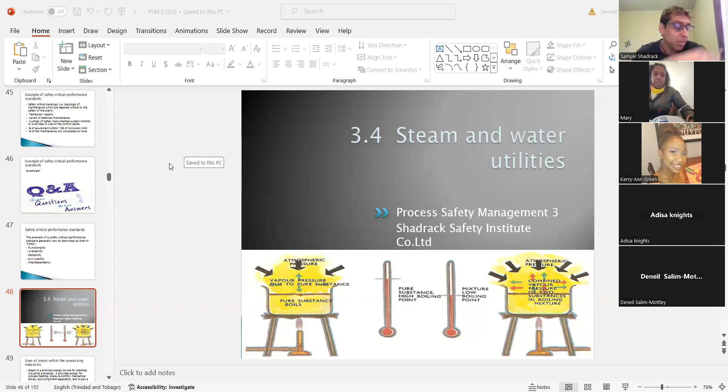So we're looking at STEAM. Let me just run through the slide first to get something behind us, and we'll look back at the book a bit. I'm actually on page 72, 73 already. So STEAM, the heading here is the uses of steam within the process industries.

Steam is a principal energy source for chemical industrial processes. It provides energy for process heating, pressure control, mechanical drives, and component separation, and is also a source of water for many industrial operations and chemical reactions. The popularity of steam as an energy source stems from its many advantages, which include low toxicity - remember, it's steam, it's water that you heat - transportability, high efficiency, high heat capacity, and low production costs relative to other energy transport mediums.

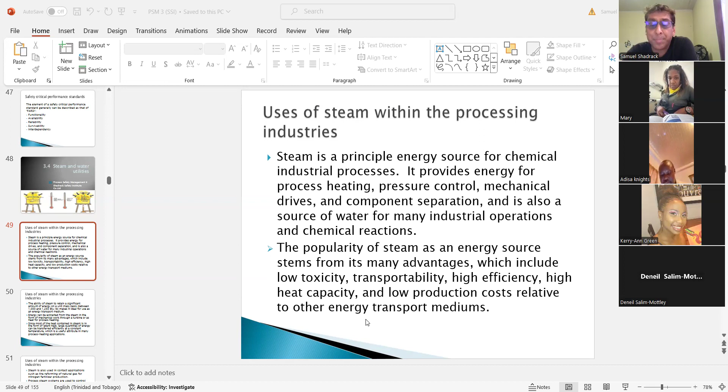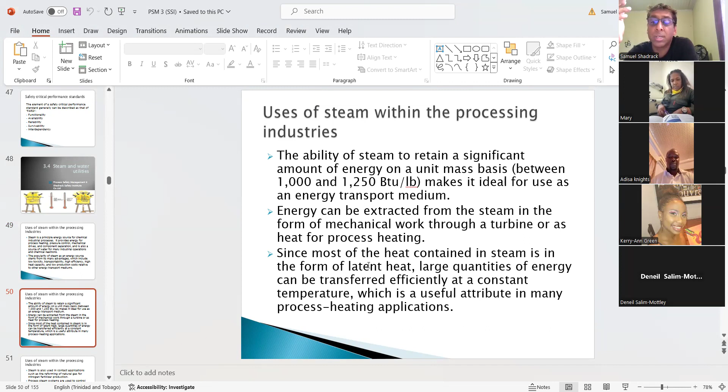Nothing there for the exam as yet. So reading on: the ability of steam to retain a significant amount of energy on a unit mass basis, between 1,000 and 1,250 BTUs per pound, makes it ideal for use as an energy transport medium. Energy can be extracted from the steam in the form of mechanical work through a turbine or as heat for process heating. Since most of the heat contained in steam is in the form of latent heat, that means hidden heat, large quantities of energy can be transferred efficiently at a constant temperature, which is a useful attribute in many process heating applications. Steam is also used in contact applications such as the reforming of natural gas for nitrogen fertilizer production.

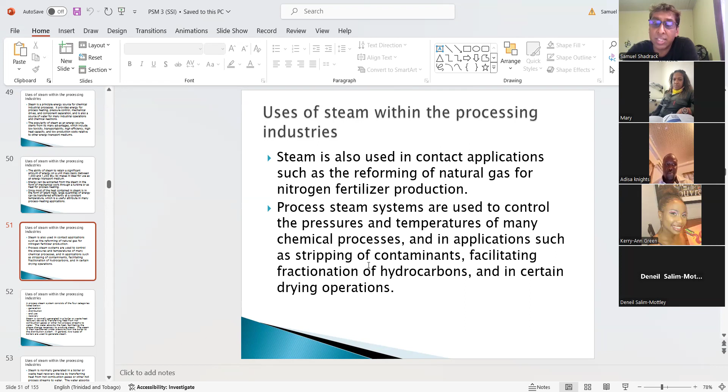Process steam systems are used to control the pressure and temperature of many chemical processes, and in applications such as stripping of contaminants, facilitating fractionation of hydrocarbons, and in certain drying processes or operations. A process steam system consists of 4 categories: the generation of steam, the distribution of steam, the end use of steam, and the recovery of steam.

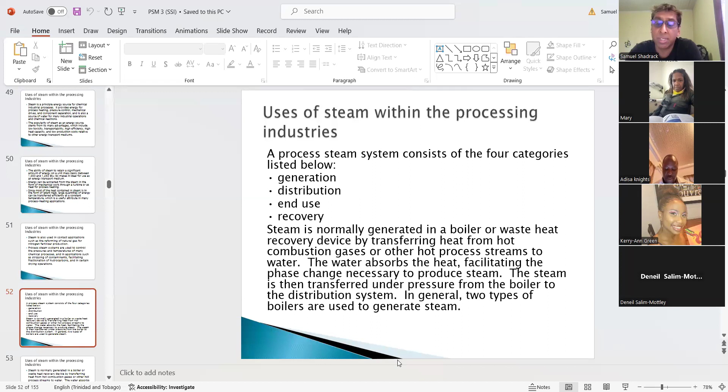Steam is normally generated in a boiler or waste heat recovery device by transferring heat from hot combustion gases or other hot process streams to water. The water absorbs the heat, facilitating the phase change necessary to produce steam. The steam is then transferred under pressure from the boiler to the distribution system. In general, 2 types of boilers are used to generate steam. I think this is the same thing from the last slide, right?

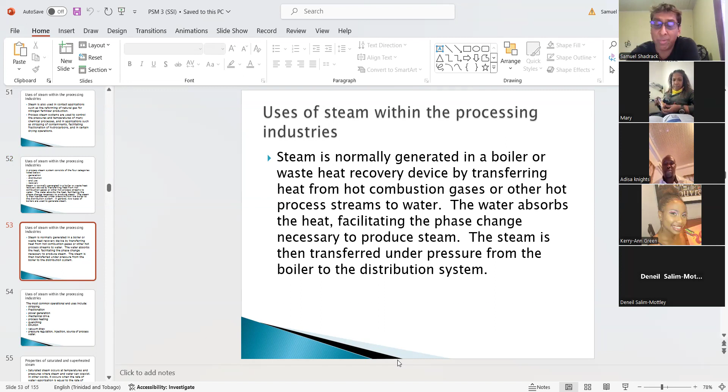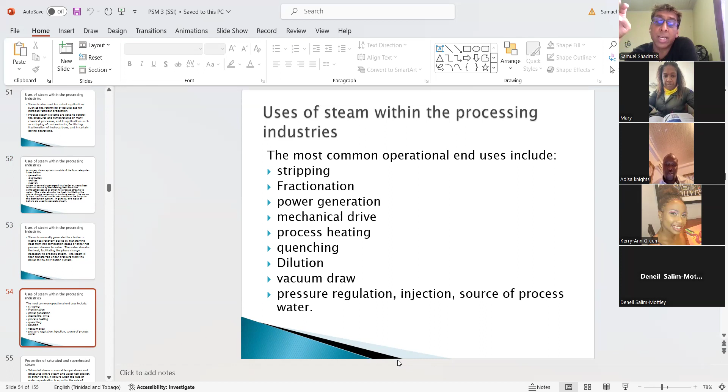The most common operational end uses of steam include stripping of contaminants, fractionation - this is the use of steam - power generation, mechanical drives, process heating, quenching, dilution, for example of oil. They use steam a lot in the oil industry. Vacuum draw, if they want to clean a tank, steam can be used for that. Pressure regulation, injection into wells like oil wells, and as a source of process water.

Okay, so none of that is for the exam. So I'll tell you to read and get to the exam question. So the exam question is this.

If you have your book, page 72, steam is good, it's just water that you heat up. So if you watch the slide or your book, you'll see there are two kinds of steam: saturated and superheated. There are two types of steam, and what they like to ask is what's the difference between them, or at what temperature one is versus the other. So before I read, I'll explain it to you, then we'll read a little bit.

If you have made tea or boiled water or cooked food, and you lift up your pot cover, you would realize it will have steam, but also water droplets as well. That type of steam is called saturated steam. This is exam material, so I'll break it down the simplest way. Saturated steam is the steam you have in your kitchen, at 100 degrees Celsius because water boils at 100 degrees Celsius. If you boil water and take off your kettle or pot cover, you would see steam, and then you would see water. That's called saturated steam, where you have steam and water together.

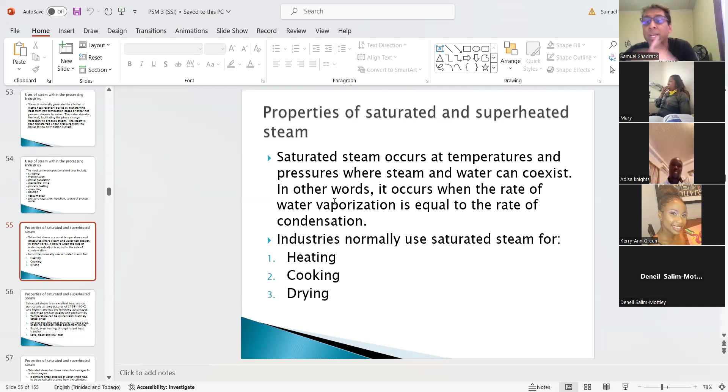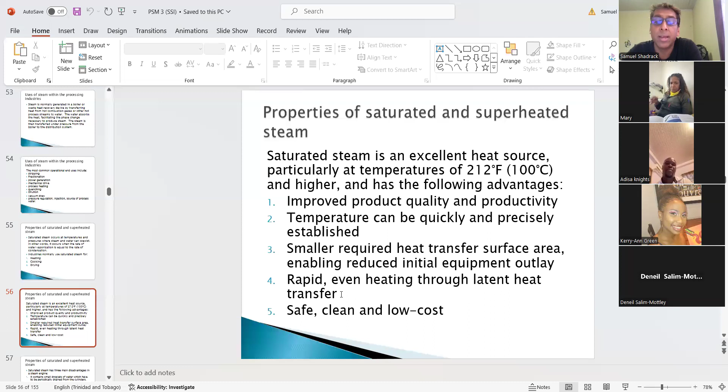If you watch the note here, saturated steam is where steam and water can coexist. All these big words mean the rate of vaporization is equal to the rate of condensation. I don't think they'll get into that, but saturated steam is the one at 100 degrees Celsius. It's easy to produce, it's just water you heat, at 100 degrees Celsius or 212 Fahrenheit.

That's saturated steam. Because it has water in it, it may contain water droplets, and that may create things like rust. There's bacteria that tends to love to live in hot water runoff, so saturated steam may cause corrosion because it has water in it. If you want to write anything down, I've said it twice already: saturated steam has water in it, contains small droplets of water.

Of course, when you're studying, you have to study your work, you can't just wait on me to pinpoint anything for you. But you read your notes and know this is a trending topic. So saturated steam has water in it, and some people refer to it as wet steam because it has water in it. Saturated steam is sometimes called wet steam.

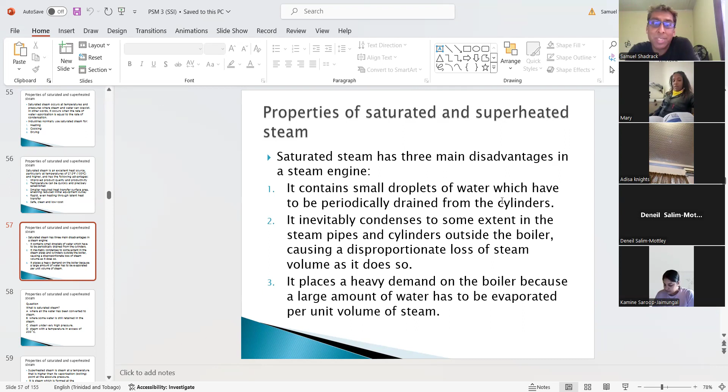Before we go to the book, I'll do the other one first. Superheated steam is steam that is above 100 degrees Celsius. You can actually create superheated steam in your kitchen, but you have to get a blowtorch. The same pot you were heating on the stove, you have to apply more fire to it. The burner would only produce so much fire, which would carry it to 100 degrees Celsius. But if you want to superheat that vessel, that pot, you'd probably need a kitchen blowtorch, which chefs around the world normally use. So if you had a kitchen blowtorch, you could apply that to your pot.

What's going to happen if you start to superheat your already existing vessel with water in it? The steam is going to disappear. The emissions from the pot, like when you're boiling water, you'll see steam, but with superheated steam it would be invisible. So superheated steam is above the boiling point, you have to exceed 100 degrees Celsius. When you do that, applying additional flame, the steam becomes invisible. Superheated steam is actually better than saturated steam because it does not have any water in it, but it has a hazard in it.

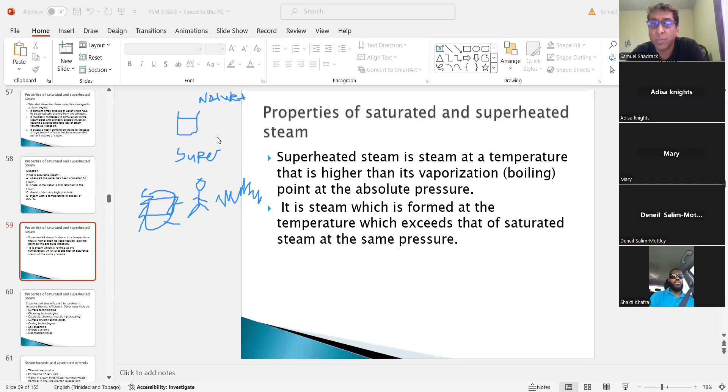And so you think you're okay with that? Just take a look at that. And they do have questions on that in every sitting anyway. Most times they tell you like, well, which one is which? So which one is superheated? Which one is saturated? There may be a question here, so we can take a look at it.

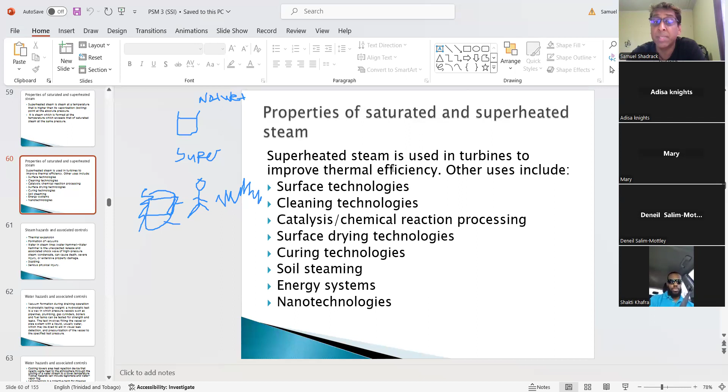This is the many uses of superheated steam. This is the one with no water now. When you heat the steam, it's very good for cleaning because it doesn't wet anything. Soil steaming, energy systems, nanotechnology to clean out those little computer bits and stuff because it's not wet. It's going to sanitize, it's going to sterilize. So superheated steam is very good for cleaning and whatever have you in the chemical industry.

Let me see if I could find the question. Some of the hazards of steam: thermal expansion, formation of vacuums, water in the steam line, and this will be talking about which type of steam. If you have water in the steam line, like what type of steam is that?

Saturated, very good, right? So let me see how to break this one down for you. I don't think there's a question there, but I guess this is if you happen to work in the industry, and you don't have to, I just saying, right?

But if you are home, and those of us in Trinidad and I guess in Guyana, if your water company put on the water then under excessive pressure, you'll actually hear the water in the line create a sound, right? So in the oil industry that's very common. When the lines are on, when they're pumping oil through the line, you have to hear it. It vibrates then, right? So that's something called a water hammer. And that could actually result in the pipe bursting and whatever have you, right?

So in steam lines, water hammer is the unexpected release and associated shock wave of high pressure steam condensate that can cause death, severe injury, or extensive property damage, as the line is broken because of the pressure of the fluid in the line, right?

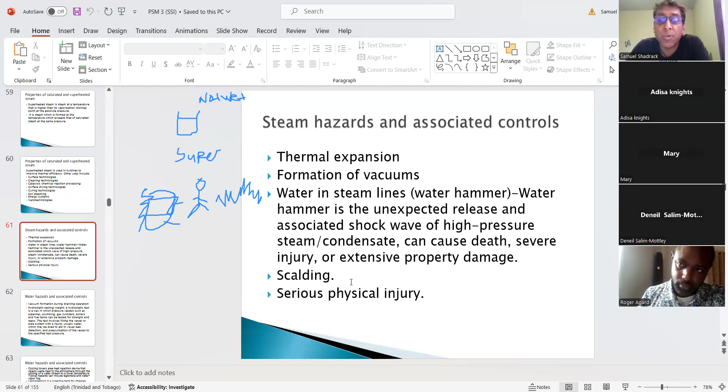Some hazards of steam could be scalding, serious physical injury, and I guess that's probably, let's see if we can find a question on steam, right? So, or did I pass it? I think I passed it. It has more than one though, but look, have a question here, right?

It comes in every sitting. Now, it doesn't have to be saturated. It could be superheated. Just remember, you just have to keep on heating the steam for it to be superheated, right? So what is saturated steam?

This is from a past paper. They have where all the water has been converted to steam, saturated steam, right? If you want, you could think of SpongeBob, a sponge, saturated, right? A sponge, where some water is still retained in the steam, under very high pressure.

The question is on saturated steam, which is the one in your kitchen. Steam at a temperature in excess of 200 degrees Celsius, right? Which one do you think is the best answer here? And I'll tell you why the others are wrong.

Saturated steam is one with what? I got one answer on the chat. Okay, B, thanks there, Shakti. That is actually, let me wait until the rest of them say something. Which one is saturated steam? Where all the water has been converted to steam.

Look at here. Saturated steam is actually called wet steam. So where all the water has been converted, that's not saturated, that's actually superheated. So A is wrong.

Saturated steam is not under any high pressure because, as the one in your kitchen, you can just boil water and you create saturated steam. And the boiling point of water is 100 degrees Celsius, so this is actually wrong. So the best answer here is actually Shakti's answer, which is B. Thanks there, Kamine, as well, right? So those two answers are correct.

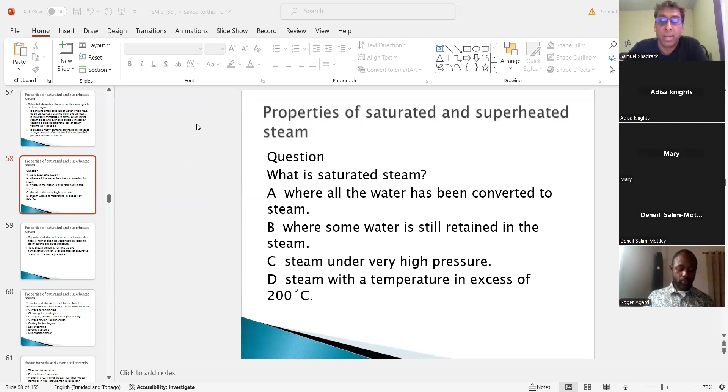All right, let's go again. So water hazard - if you want, I'll read again because there is a passage here or two. Let's read them out and then I'll tie it together. So water hazards and associated controls: vacuum formation during the draining operation, right? Hydrostatic testing or weight testing.

A hydrostatic test is a way in which pressure vessels such as pipelines, plumbing, gas cylinders, boilers, fuel tanks can be tested for strength and for leaks. The test involves filling the vessel or pipe system with liquid, usually water, which can be dyed to aid in visual leak detection, and pressurization of the vessel to the specified test pressure.

There's a question right there. If any new vessel has been created or welded, they normally hydrostatic test it. What is hydrostatic testing? They fill it with water and let it stay to see if the tank can hold the water. If anyone is familiar, there was an accident with this in Trinidad, where they filled a tank, but the tank couldn't hold the pressure and it burst.

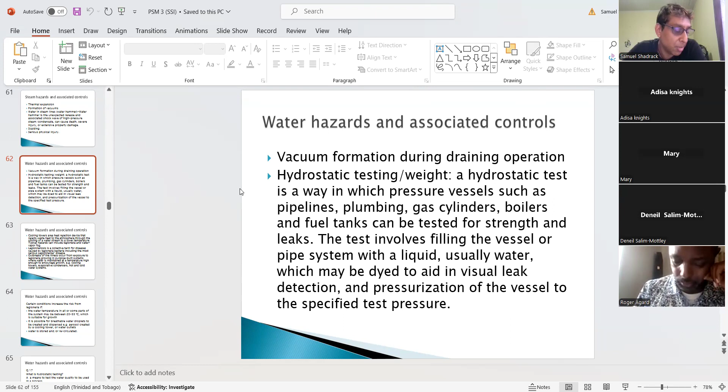And we can move on because this is a question - what is hydrostatic testing - that has come before for exam. If you look at the book, page 75, there's another kind of hazard there. Let me read it out first and then I'll explain it.

Cooling tower area heat rejection devices reject waste heat into the atmosphere through the cooling of a water stream to a lower temperature. Typical hazards can include Legionella and water-vapor fog. So just when you're cooling down steam, remember the water runoff is going to be kind of warm, and there's a bacteria that loves to live in that.

We have had some deaths in Trinidad - I'm not too sure if around the world, well, I mean like Guyana too - in terms of legionellosis. Legionellosis is a collective term for diseases caused by the Legionella bacteria, including the most serious, Legionnaire's disease. Outbreaks of the illness occur from exposure to Legionella growing in purpose-built systems like a condenser, something that has to cool down steam, where water is maintained at a temperature high enough to encourage growth. Examples: cooling towers, evaporative condensers, hot and cold water systems.

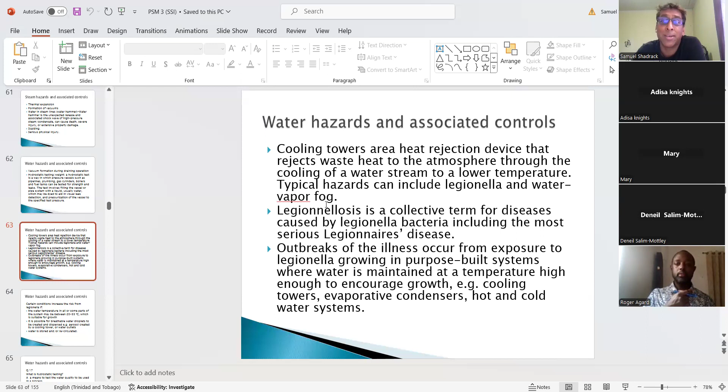Anyway, I used to be working all around all of those things and I never even knew that. I mean, when I used to be working in the industries, I never knew that. I used to be working all around those condensers, literally where the water run-off was, right?

Anyway, water hazards and associated controls. Certain conditions increase the risk of Legionella if the water temperature in all or some parts of the systems are between 20 to 55 degrees Celsius.

A pause because you have to know that. I don't know if you want to find it in your book, page 75, or just take it in the notes. That's where the bacteria like to live, where the temperature is between 20 and 55 degrees. It is possible for breathable water droplets to be created and dispersed - example, aerosols created by a cooling tower or water outlets - where water is stored and/or recirculated. If you get those places where you have warmer waters being recirculated, and the bacteria is in that, you can actually breathe in the bacteria if you breathe in the water droplets, right?

Where water systems have temperatures maintained at 20 to 55 degrees Celsius, it could result in bacteria growing there, and the bacteria results in a condition known as legionellosis or Legionnaire's disease.

Let me see if it's on this slide. Okay, if not, let me tell you. Legionnaire's disease symptoms are like the flu, like COVID-19. The symptoms are the same as the flu. And why I mention COVID-19 is because it affects the lungs, and Legionnaire's disease also affects the lungs.

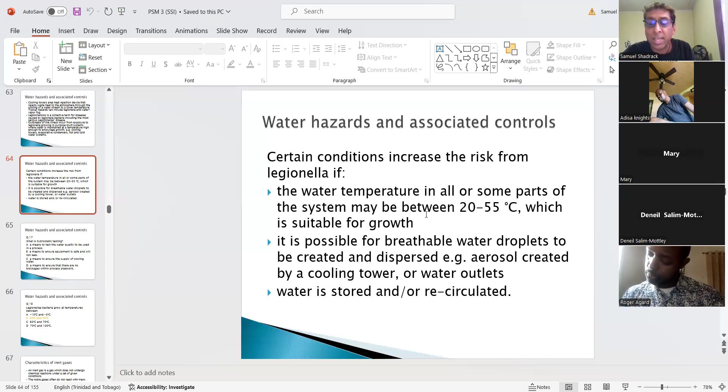Folks, I think there are two questions here, but I'm going to make three out of it. I think there's one there, but I'll make three because there's another tricky one I saw, and I wanted to give you my opinion on that answer as well.

So this one here: what is hydrostatic testing? A, it means to test the water quality to be used in a process. B, it means to ensure the equipment is safe and would not leak. C, it means to ensure the supply of cooling water. D, it means to ensure that there are no blockages within the pipework.

What is the purpose of hydrostatic testing? Why do we fill the tanks with water before we actually fill it with oil? What's the purpose of it? Which is the best answer? B. Very good.

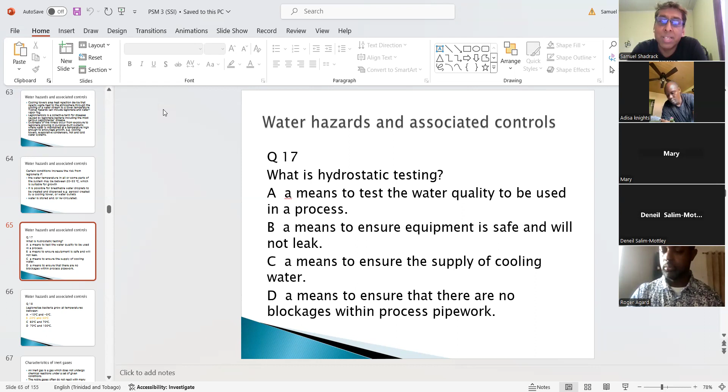So B for this one. Let's take a look at this one.

Well, I kind of highlighted the answer for it, right? Legionella bacteria grow at temperatures between 20 and 55. Remember, you have to learn this for the exam. You are seeing it, I've said it, and you are seeing it. 60 to 70, 70 to 100, right? All right, so listen to this one.

So that's the end there for steam and water and stuff, right? And we came across quite a lot of questions. What is saturated steam? What is superheated steam? What is hydrostatic testing? What is the condition needed for Legionella to develop, right? And we know how serious Legionella is. If this is not treated, the person will die. I told you before, I know of some deaths of this in vessels here in Trinidad as well.

All right, listen to this one though. I don't know if you want to paraphrase one for me. When I say paraphrase, I'm going to write it on the slide.

Okay, so very good for those who took part. I had Shakti there again. Let me just check on the chat, but the thing seems to be frozen. Let me see what's happened. Okay, okay, good, I don't think it moves anymore from that.

All right, so there's another question I saw and I wanted to take this down, so we can take it to be the same question. Legionella bacteria grow at temperatures between, but another question went like this, right? So the answer, well, 20 degrees - by the way, I'm making up these, but I remember some of the numbers then, right? So like, what do you put now if they give you something like that? These are some of the numbers I saw on that past paper.

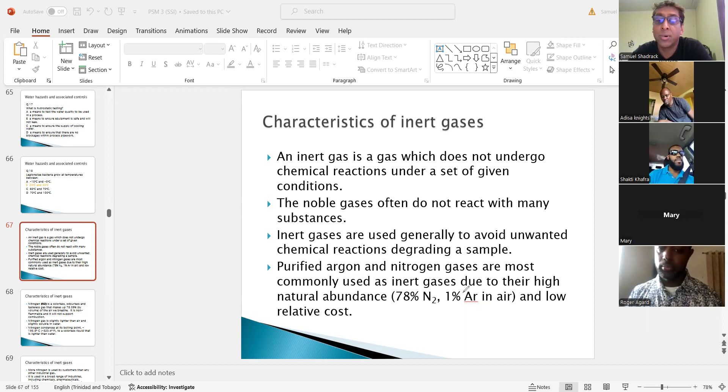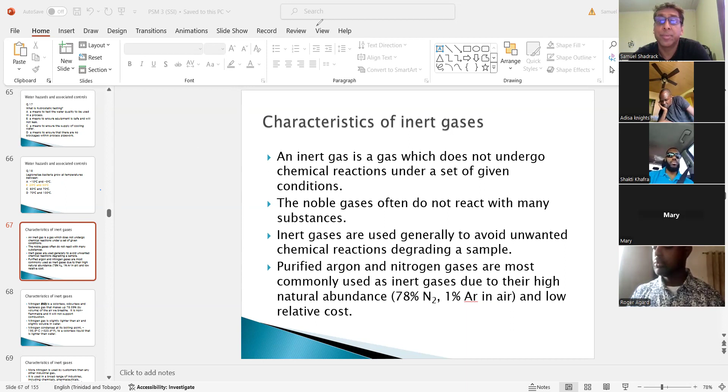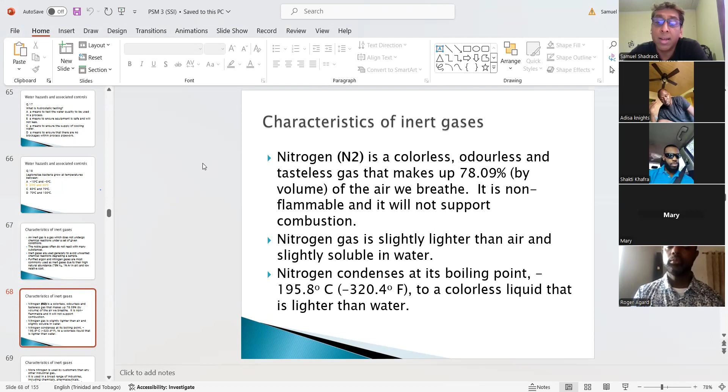So, moving on. Nitrogen is a colorless, odorless, and tasteless gas that makes up about 78.1% by volume of the air we breathe. It is non-flammable and will not support combustion. Nitrogen gas is slightly lighter than air and slightly soluble in water. Nitrogen condenses at its boiling point, which is minus 195.8 degrees Celsius, or minus 320.4 Fahrenheit, to a colorless liquid that is lighter than water.

More nitrogen is used by customers than any other industrial gas. It is used in a broad range of industries, including chemicals, pharmaceuticals, petroleum processing, glass and ceramic manufacture, steel making and other metal refining and fabrication processes, pulp and paper manufacture, and healthcare. Aside from nitrogen, N2, nitrogen may be referred to as GAN or GN in its gaseous form, and LIN or LN in its liquid form.

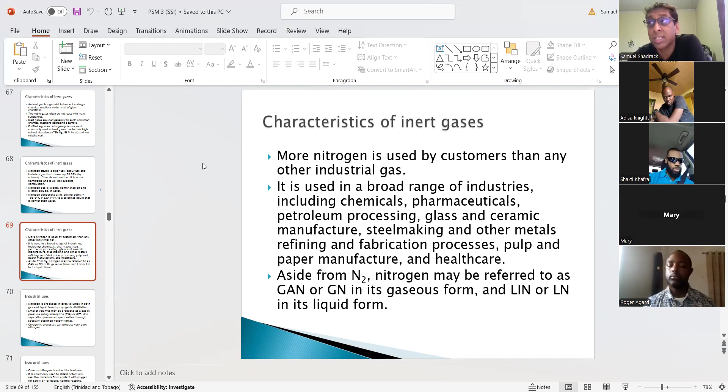I actually saw that in a company in Trinidad. Before I saw it, I didn't think we used that, but Trinidad does produce nitrogen. Remember, we have that capability, right? Massy gas and stuff does a bunch of that as well.

Nitrogen is produced in large volumes in both gas and liquid form by cryogenic distillation. Smaller volumes may be produced by pressure swing adsorption or diffusion separation processes, which is permeation through specially designed hollow fibers. Cryogenic processes can produce very pure nitrogen.

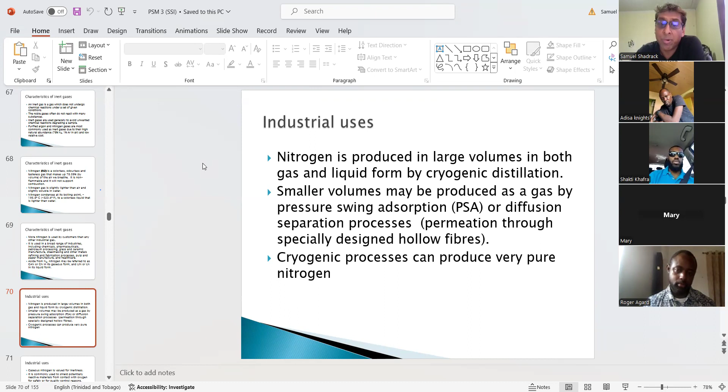Gaseous nitrogen is valued for its inertness. It is commonly used to shield potentially reactive materials from contact with oxygen for safety or quality control reasons, providing inert atmospheres, purging, and blanketing of storage tanks. It is used as a firefighting agent. It is used in pipeline freezing operations. Nitrogen can also be used in certain instruments as a backup supply of air, where they don't want to use oxygen because oxygen may be a source of fire.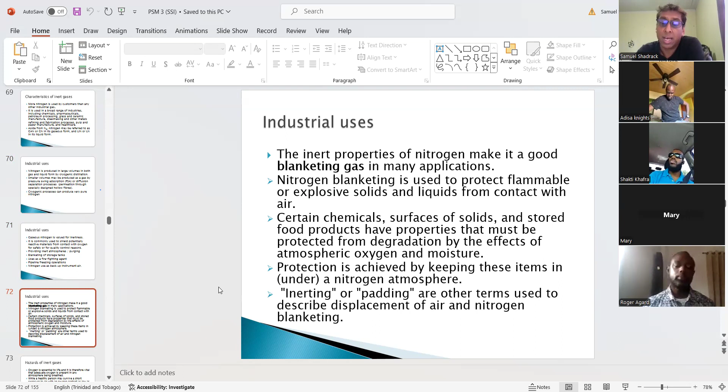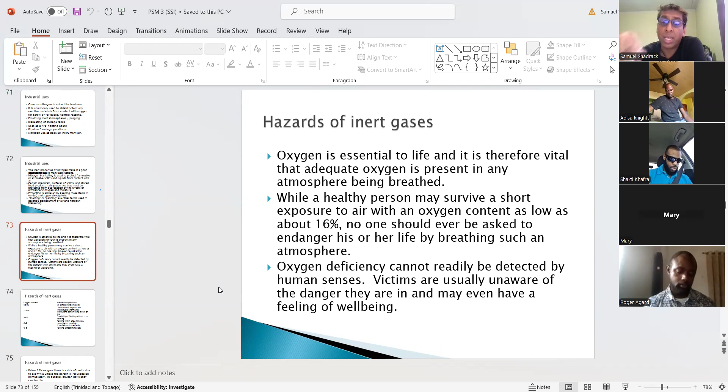Oxygen is essential to life and it is therefore vital that adequate oxygen is present in any atmosphere being breathed. While a healthy person may survive a short exposure to air with an oxygen content as low as 16%, no one should ever be asked to endanger his or her life by breathing such an atmosphere. Oxygen deficiency cannot readily be detected by the human senses. Victims are usually unaware of the dangers they are in and may even have a feeling of well-being.

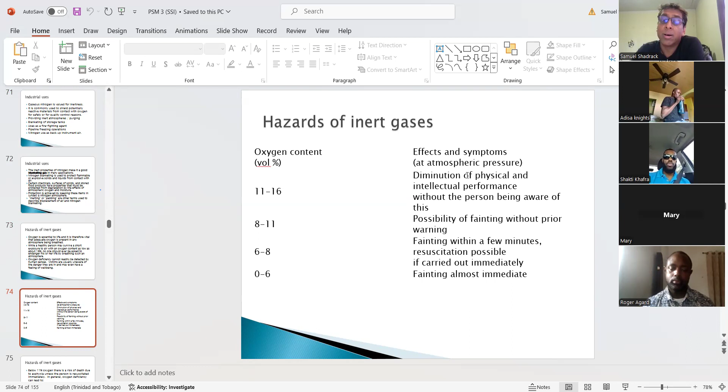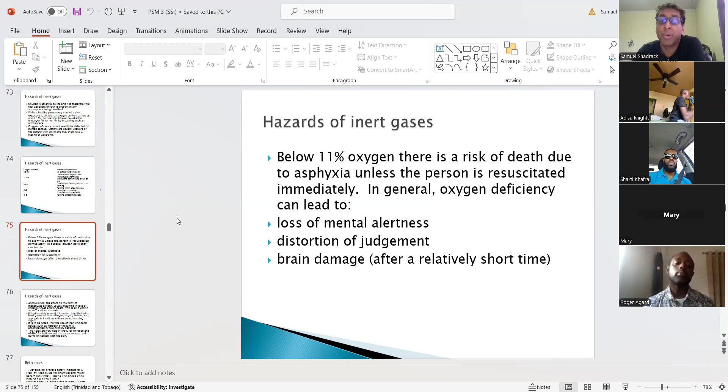So this is what happens to the human body if you're breathing less oxygen. We should be breathing in 21%, which is what is in the air right around us. About 19.5%, you may start to feel dizzy, but at the lower percentages, 6 to 8%, fainting within a few minutes. 11 to 16%, the person may be, without being aware of it, experiencing a reduction in physical and intellectual performance. And below 11%, there's a risk of death, which can lead to loss of mental alertness, distortion of judgment, brain damage after a relatively short period of time.

Okay, one last slide. Asphyxiation, the effects on the body of inadequate oxygen, usually results in loss of consciousness and or death. This is known as suffocation or anoxia. It is absolutely essential to understand that with inert gases, such as nitrogen, argon, helium, asphyxia is insidious, meaning there are no warning signs. It is to be noted that the use of inert cryogenic liquids such as nitrogen or helium is accompanied by two primary hazards. The liquids are very cold and can cause serious cold burns on contact with the skin.

All right, so here's the question, right? The question here is what is the main effect of nitrogen? Like if they use nitrogen for cleaning a tank, or to ventilate the tank, or to inert the tank. Wherever they use nitrogen then, right?

They use it in Atlantic LNG a lot. What you have to know is, let me write something here so you see clearly, sometimes we see it and you're not picking it up. So the main thing is: if you use nitrogen to purge a tank, you will have 0% oxygen. Zero. Not 1, not 16, 0% oxygen. I'll say it again, if you use nitrogen to purge a tank, you will have 0% oxygen.

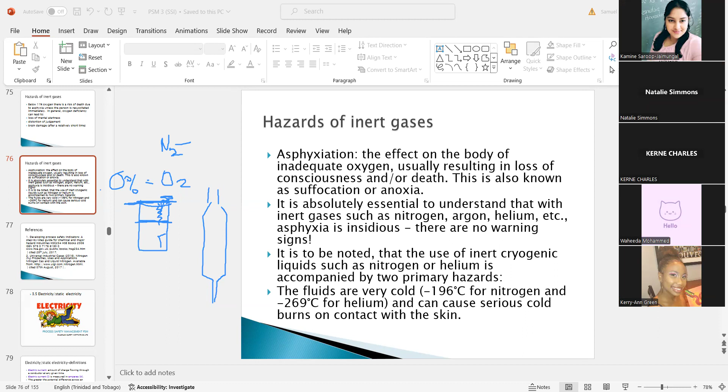While I was in Guyana, because I have some Guyanese folks here - about 2 or 3 Sundays ago, when I landed, there was a case of some people who were stuck. I guess they went out into the rural parts, like on a trail with their vehicles, and got stuck in the mud. Long story short, they left the vehicle running because it had kids in it, and the vehicle sank into the mud. The exhaust fumes came back into the vehicle, and the occupants fell asleep and got asphyxiated and died. That's not nitrogen, that's actually carbon monoxide, but the same idea - it replaces the oxygen. In those cases, death is often the result.

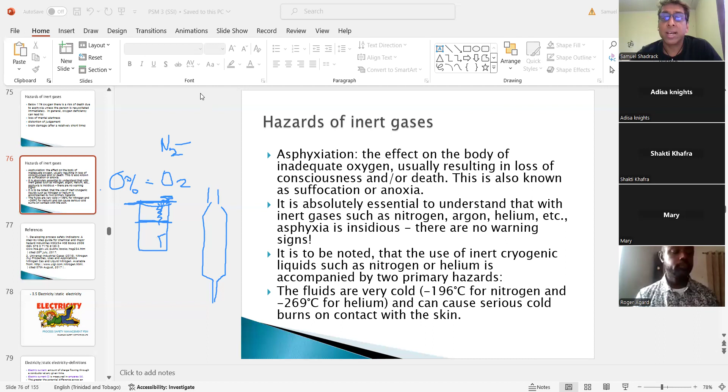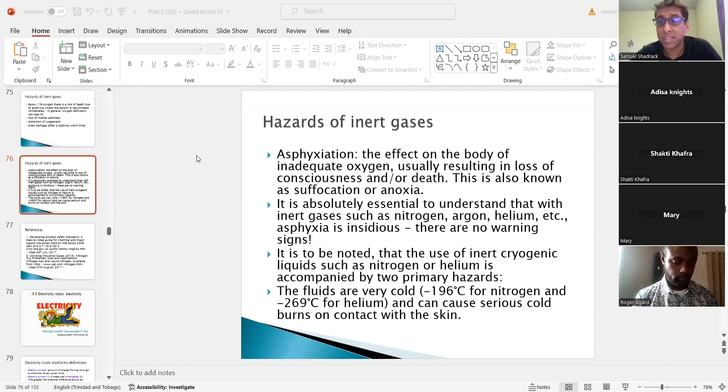It's 2 o'clock. We can turn the page a bit. We are on to electricity.

All right, so electricity, you all okay? You all alive still? You all with me still? We can sleep in, I know it's a difficult time, but if you take part in this, it'll be less stressful.

All right, so electricity, let's get to this. I try not to overdo it, because remember there's a lot of notes, but then there's just like 1 or 2 questions, so we can try to focus on that.

So electricity, we have some definitions here. What is electric current? The amount of charge flowing through a conductor at any given time. Electric current is measured in amperes. This is another word for voltage: potential difference. The greater the potential difference across an electrical conductor, the greater the electrical pressure that influences the flow of charge through the conductor.

Electrical pressure is known as the voltage. So the greater the voltage, the greater the current. Think about the sockets you have at home. If you have a washing machine or an AC unit, maybe that's plugged onto 220, but everything else is like 110. So the greater the voltage, the greater the current.

Really don't have any questions there, though it may have one. There's what is known as resistance. Resistance is measured in ohms. And there is a formula linking those three terms together: the current, the voltage, and the resistance. The formula is V is equal to IR.

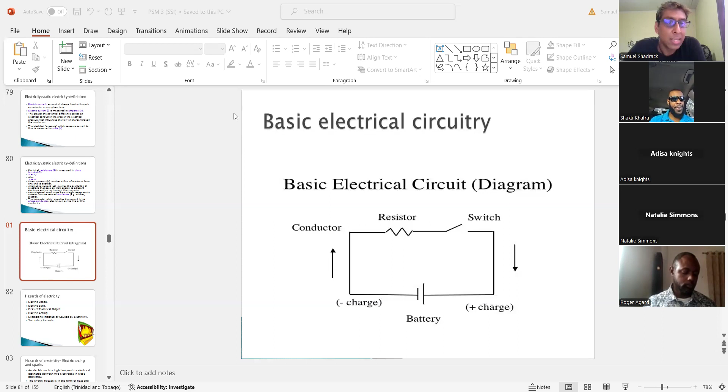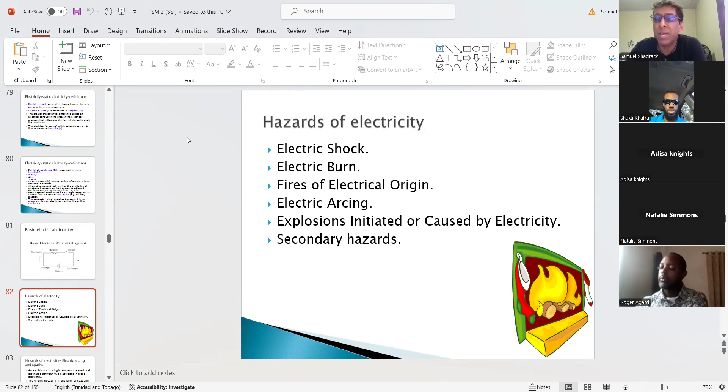The next thing in the book is hazards of electricity, which I have here: electric shock, electric burns, fires of an electrical origin, electrical arcing, explosions. It may be all of the above. If they ask where's the hazard of electricity, all of the above, right?

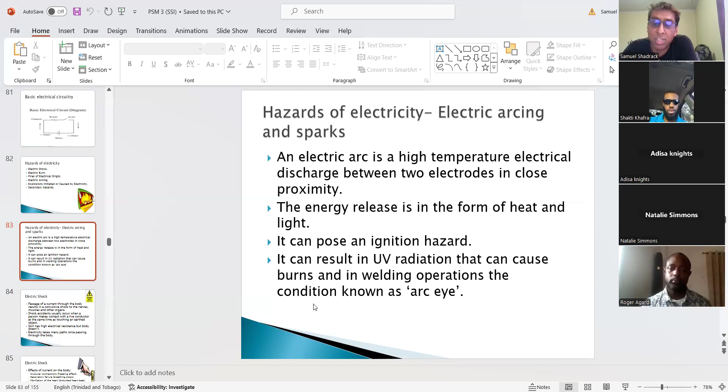Electric arcing. An electric arc is a high temperature electrical discharge between two electrodes in close proximity. The energy released is in the form of heat and light. It can pose an ignition hazard. It can result in UV radiation that can cause burns, and in welding operations, the condition known as arc eye. No questions here, so I'm moving on.

Electric shock: passage of a current through the body results in a convulsive shock to the nerves, muscles, and other organs. Shock accidents usually occur when a person makes contact with a live conductor and at the same time is touching an earthed object. Skin has a high electrical resistance, but the body doesn't. Electricity takes many paths once passing through the body.

By the way, not in Trinidad now, in Guyana, I think there was a death with this. There was a death when I was there. Somebody got electrocuted. I think somebody tried to help, and the person that tried to remove the person also got shocked too. I have it on my chat here.

I can read it for you. Yeah, the person actually died. The Ministry of Labor — this is Guyana, right? Safety and Health Department has launched an investigation into the fatal accident that occurred just outside SE Auto Sales and Spare Parts. I jotted down a bit. The deceased has been identified as 32-year-old part-time body work mechanic of the company, Ramraj.

Palakadari was a resident of Block 20, Hasselton, ECD. According to the report, Palakadari usually arrives early at work and is tasked with repairing, renovating, and displaying the vehicles sold by the company. I'm going to try to jot down a bit, right?

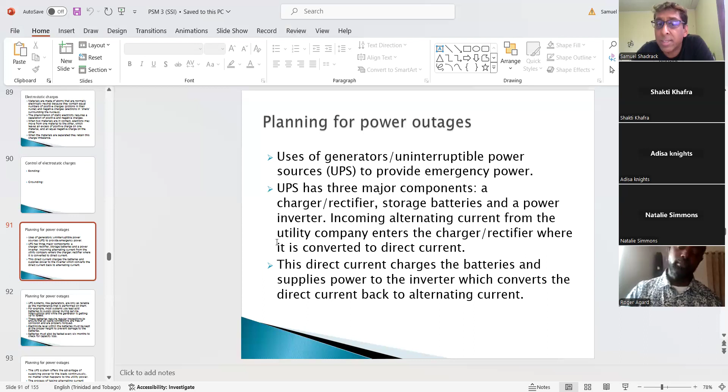I don't like generators too much because they create carbon monoxide, and carbon monoxide, as I mentioned with that story, is an asphyxiant. It would displace oxygen and could result in you going to sleep and not waking up. So these uninterruptible power supplies, like generators, are only as reliable as the maintenance performed on them. For example, most systems use lead acid batteries.

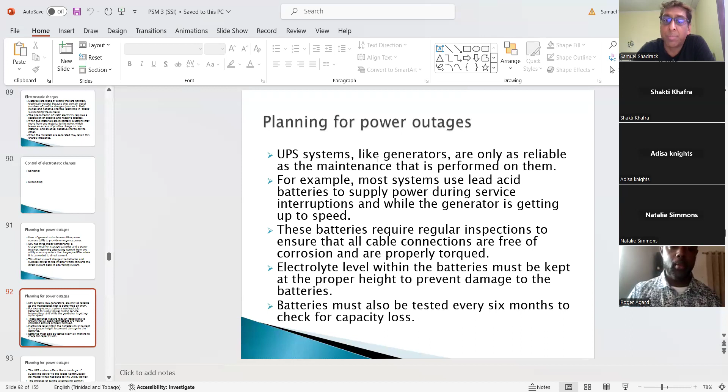So you can read this out. I don't think there's a question here. This is all about planning for power outages, generators, and backup systems.

So there's a common question here that I was trying to reach. Like we said, there are things that are sure to come up, for example, what is process safety? The PDCA cycle is common. If you want, you could line this up with around page 84.

But I would have zoned in on the question because it's about 18 minutes past 2. So I'll read one or two and zone in on the question. Like I was saying, everything has a question. Bow tie may be a question too.

But this one here, like how we did today with steam, there's going to be a question on steam. There's a question on nitrogen. This is a common question here. Let's just read about 3 slides and then I'll zone in on the question.

Based on the time. So if you look at your book, they have dangerous substances, the same thing here. What is a dangerous substance?

The Dangerous Substances and Explosive Atmospheres Regulation, they have a law for it, DSEAR for short, defines a dangerous substance as a substance or preparation which is explosive, oxidizing, extremely flammable, highly flammable, or flammable. That's not the exam question though, I'm moving on.

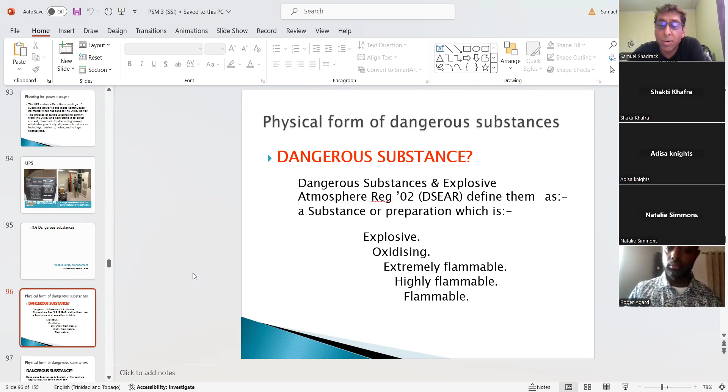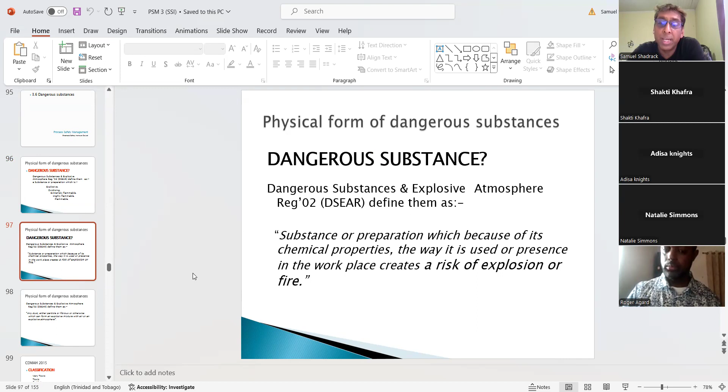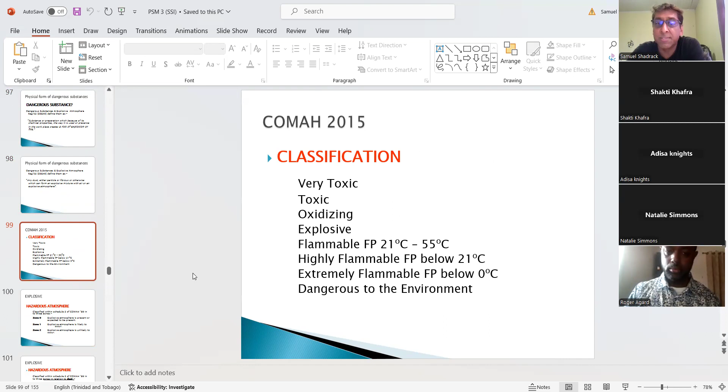So I'll just read one more. Another definition for a dangerous substance is a substance or preparation which, because of its chemical properties, the way it is used or present in the workplace, creates a risk of explosion or fire. All of these describe what a dangerous substance is: very toxic, oxidizing, flammable, highly flammable, extremely flammable. That's not the exam question either, but this is the exam question.

So let me explain it here a bit. The same law you're looking at here, COMAH, is a law from chapter 2. The Control of Major Accident Hazard Regulation requires the company to have a MAPP policy. Anyway, long story short, that law requires the employer to categorize the areas that a worker is working in if they are exposed to a dangerous substance. They call it zoning, they require the employer to zone the area.

Let me see how best I can do this in a short period of time. So in the world today, there are two types of zones that are used. There's a classification for gases, and there's a classification for dust. So there are two types of zoning numbers used: a zone classification for where you have gases, and a zone classification for where you have dust. Quickly, the zone classification for gases is 0, 1, and 2. And the zone classification for dust is on the other slide, but as I wrote it already, I'll write it here for you: it's 20, 21, and 22. I'm going full steam ahead.

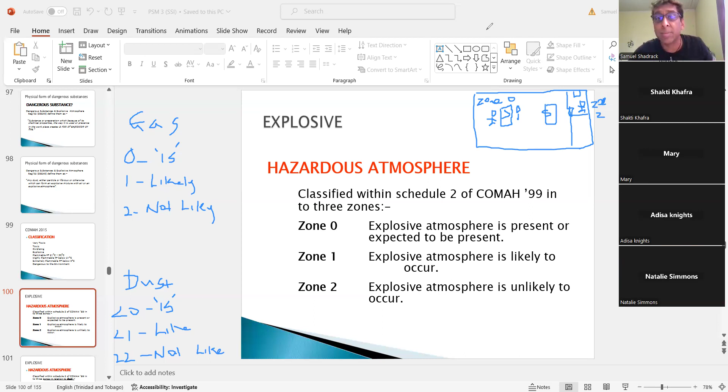So it's like this, it's not too hard. Let's take a look at a past paper and you'll see what I mean. By the way, your book has one. I don't know if the book has the same questions as the slide. Do you want to watch it from the book or in the slide? If you have your book - if you don't, I'll have to line it up anyway, which takes extra time. Look, there's a question here, but the same question is in the textbook.

It's exactly in chapter 4, they have it though, but we have it right here on this slide. Those of us with the book, they have it... I probably lost it, didn't I? No, they have it on page 127. It's the same question. Page 127 in your textbook is the same question, just repeating at different times and stuff.

So they say, which of the following is a zone 1 classification? Already you're supposed to be thinking gas, right? And if you study your work, you're supposed to be thinking gas and which one is likely. So you just watch for the answer, shade it on the exam paper, and move on. So which of the following is a zone 1?

A: a place in which an explosive mixture in the form of a cloud of combustible dust... When I read dust, I forget that one, because remember, zone 1 deals with what? Dust or gas? Gas, right. So when I see dust, I know that answer is wrong long time, so I'm moving on. A is wrong.